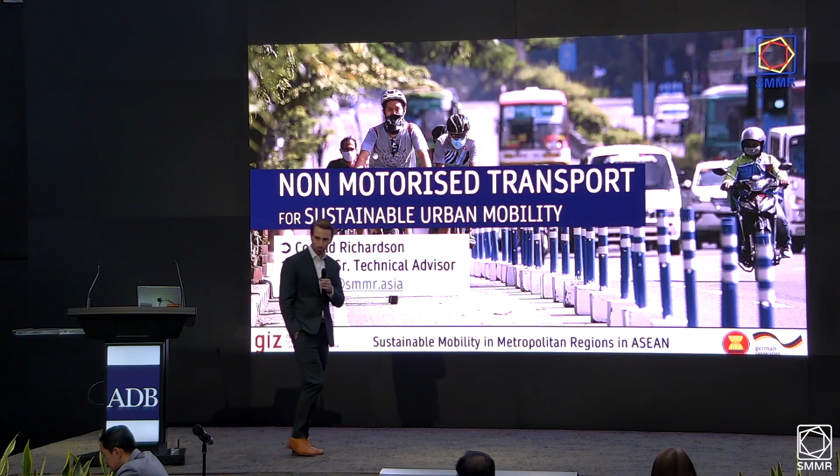I will be delivering the next two modules, this one on non-motorized transport, which I'm learning is and has been quite a hot topic in the Philippines. Non-motorized transport is key to sustainable urban mobility. So today we'll cover the fundamentals. We will look at the local context and we'll get very local.

I made a video of myself going for a walk around Pasig. We'll look at some of the best practices, and then from the best practices, we'll also do a brief tactical intervention if we have time, where we basically draw on satellite images and street cross sections.

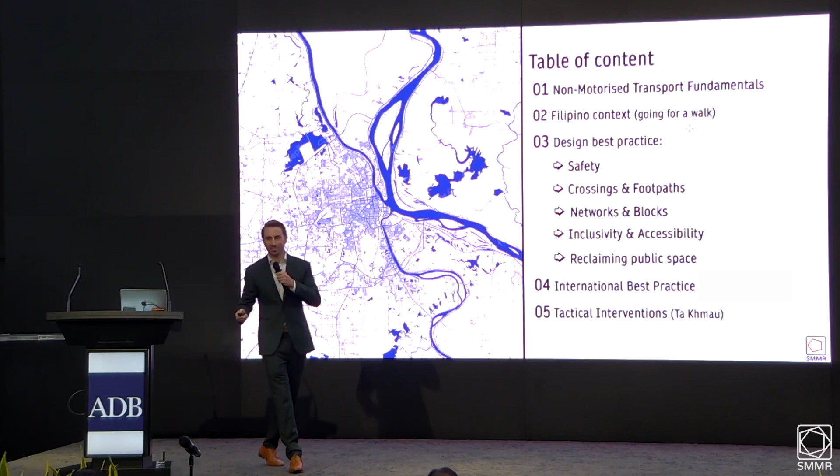So first things first, what is non-motorized transport? Can anyone name a mode of non-motorized transport? Bicycle, yes. Walking. Anything else? Baguio, I learned yesterday, has an interesting mode of non-motorized transport. Horses. I saw that in the video there was a horse icon. And then I inquired, and you have horses. What percentage of the mode share? Very small. Okay, so no justification for segregated horse lanes.

Not yet. So yes, walking, cycling, small wheel transport, wheelchair travel - it's essentially a form of transport that doesn't have an engine or a motor, which is in the name, non-motorized, and it's often referred to as active mobility or human-powered transport. It's a huge topic. It covers many different areas, from walking to cycling to parking to how you integrate utilities in your streets, green infrastructure, etc. We don't have time to cover it all today, but what I hope to get is an understanding of which areas of non-motorized transport and street design you would benefit from support.

But today we'll focus mostly on walking. That is really the fundamental of our transport systems, and we'll talk a bit about cycling, but not so much, because that is a huge topic in and of itself.

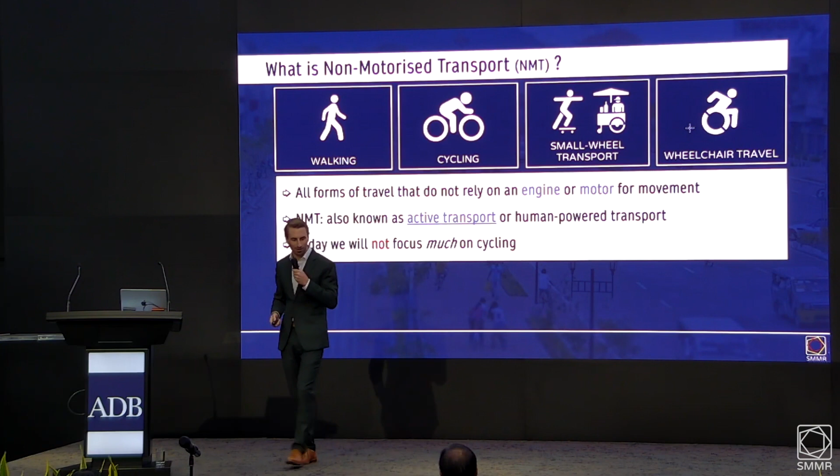And why do we promote non-motorized transport? Any input from anyone? Health reasons. Perfect. Cost. It's good for the wallet. Lower emissions. Yes. So yes, non-motorized transport is great at the personal level as an individual.

There's a lot of health benefits if you cycle. We met Karen yesterday at Pasig. She loves to cycle, and she did it for health reasons and economic reasons, also environmental reasons.

You can also avoid congestion, more or less. I see some of the cycle lanes in Pasig are congested with non-bicycle vehicles, which is not ideal, but I am pretty sure that for a lot of short distance trips in Manila and possibly in your home cities, you can get to your destination faster by bicycle, maybe sometimes even on foot, depending on the time of day.

So at a personal level, lots of benefits, but of course these benefits extend to the societal level. If you have a high share of walking and cycling, you will have lower public health costs. You will reduce the overall levels of congestion, which is beneficial, and you can also boost transit ridership. So a low share of walking is often not good in the context of creating new public transport systems.

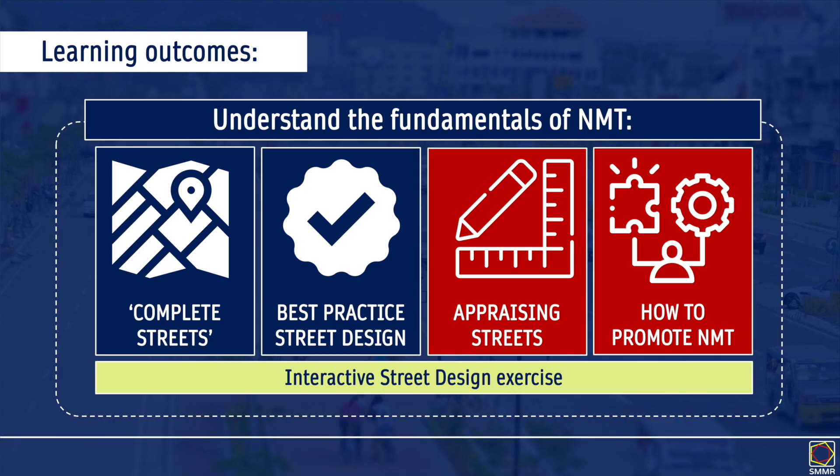And today, again, it's a huge topic. But by the end, I hope you have a better understanding of complete streets, what they are, versus traditional car-based streets, and we'll also look at best practice street design. And if we have time, we can look at different tools to appraise your streets and how we can promote non-motorized transport.

And I'd also like to also shape the discussion on how we can better communicate non-motorized transport activities, because sometimes they are not popular. I understand a lot of the recent efforts since COVID are not universally popular, and we all have a role of better communicating why we are promoting NMT. For example, using the 7 Ps of marketing we discussed yesterday.

And a lot of the reference material I use is from the Global Street Design Guide. This is, if you don't mind me saying, the Bible for non-motorized transport planners and street designers. It is a fantastic reference. It's full of nice schematic diagrams, so I highly, highly recommend this. And then, of course, I've looked at some of the road safety design manuals in the Philippines.

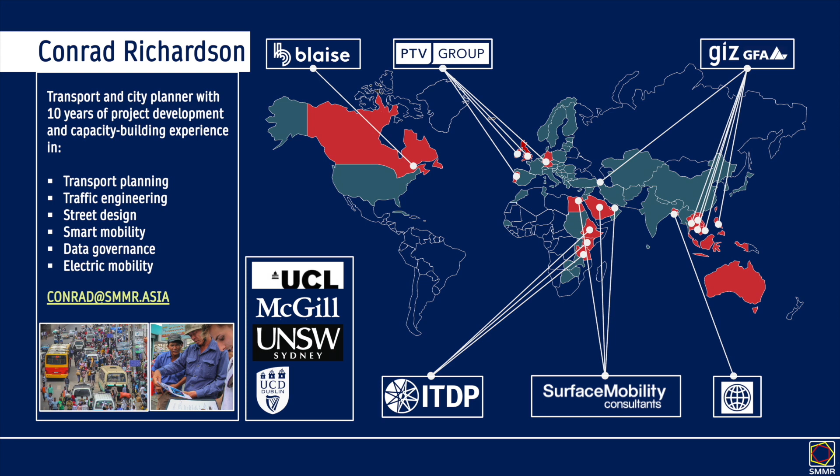About me - I won't go into depth here, but I worked in non-motorized transport for ITDP. Sovan mentioned them yesterday, they do great work on TOD and non-motorized transport, and I worked in East Africa with them. Since joining the ASEAN GIZ project, we are looking at non-motorized transport activities in our focus regions, and that includes the Philippines. We would really like to develop additional and new activities in one or all of your cities.

In Cambodia, where we are based, there is much work to do. The Philippines is decades ahead of Cambodia when it comes to walking and cycling, and the topic is still very dangerous. It's hard to talk about walking and cycling to the government, so we've had to develop our own methods. The situation is that a lot of government officials have cars and develop policies and designs around cars because they drive their cars, and oftentimes pedestrians are forgotten.

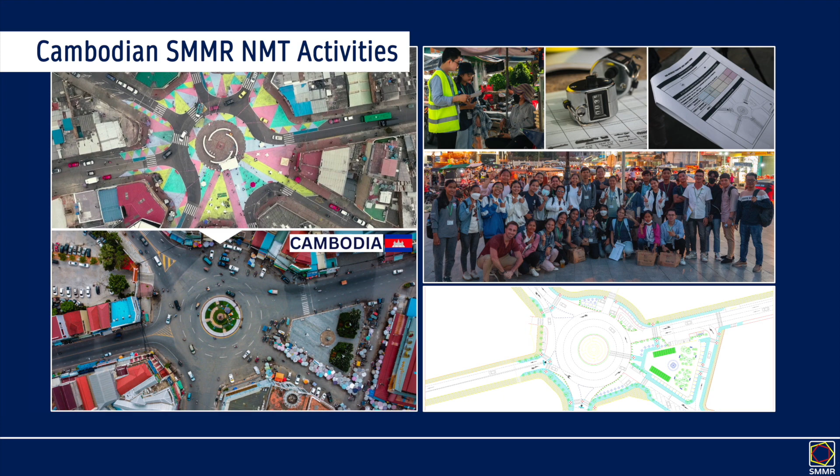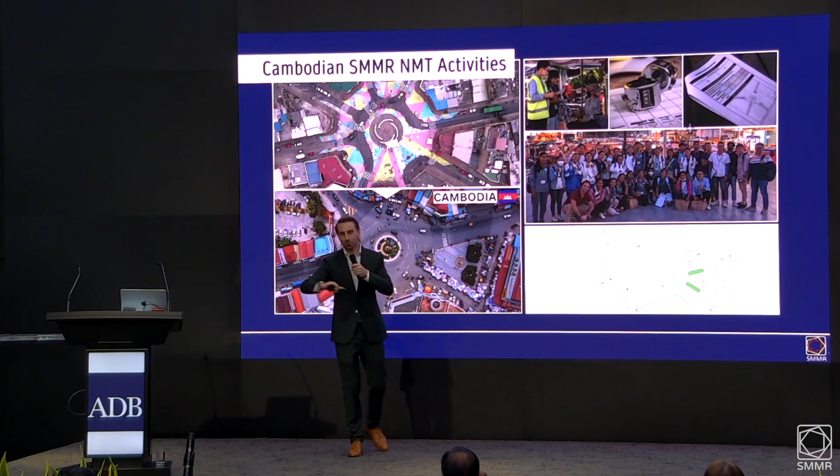So what we've ended up having to do in Cambodia is gently introduce non-motorized transport and good street design concepts disguised in traffic flow improvement projects. This is in Colombia. We are working on something very similar at an intersection in Cambodia, where we will really improve the traffic flow and the parking situation, but in doing so, we will reclaim lots of public space. That's an interesting approach to introduce these concepts in a rather gentle way. This is done with paint and plants, so if it's not popular, it's easy to remove, and if it is popular, then you can make it a permanent installation.

And that's called tactical urbanism. If we have time, we can get back to that.

But before we go any deeper, I'd like to take us on a little walk, a walk some of you might have done as well, to Shaw MRT station. I think we can play the video. This is me, Saturday, around 3 p.m., so not peak hour. And I leave the hotel.

Here you can see, I like this - this is good, you have an accessible at-grade ramp here as well, so if you're a wheelchair user, you can cross the street. It sort of leads into the bike lane, which is not ideal. Here we have a bike lane, I did see it used. They are used quite widely in Pasig, which is good, and they're not very protected, but they're somewhat protected.

And here I am crossing the street. This is a refuge island in the middle of the street. This is good, it helps me cross in two stages, and it means I can cross safely, check one side, check the other side, then cross. Here we continue - again, an accessible ramp, but there is a curb, so I don't know if a wheelchair can get up that. For me, it's fine, I am young, I am fairly agile. This is easy to navigate, but maybe not for everybody.

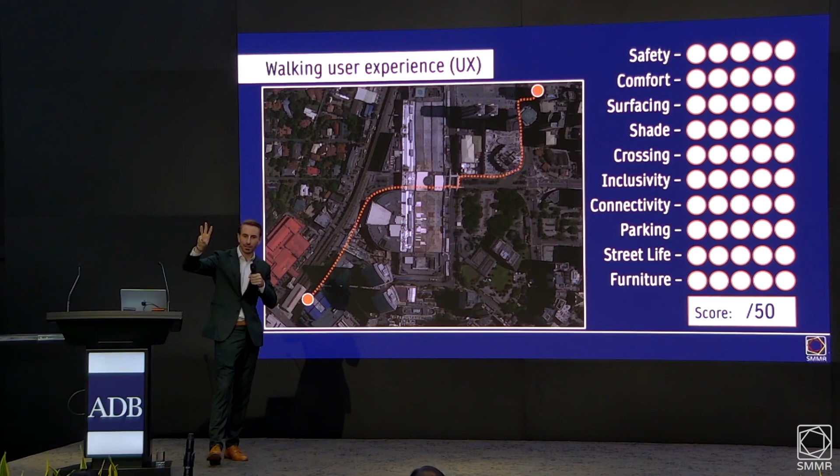If we go to the scoring criteria, and we can put up our hands, this is purely by feel. How safe was my walk? Out of 5? 3? Yeah, I didn't feel like I was in great danger. There was a few moments when I was passing the entrances of the malls, so I think 3 is fair.

Comfort? 3? Okay. You haven't been to Cambodia. We're really on the street in the city center, and this is quite enjoyable.

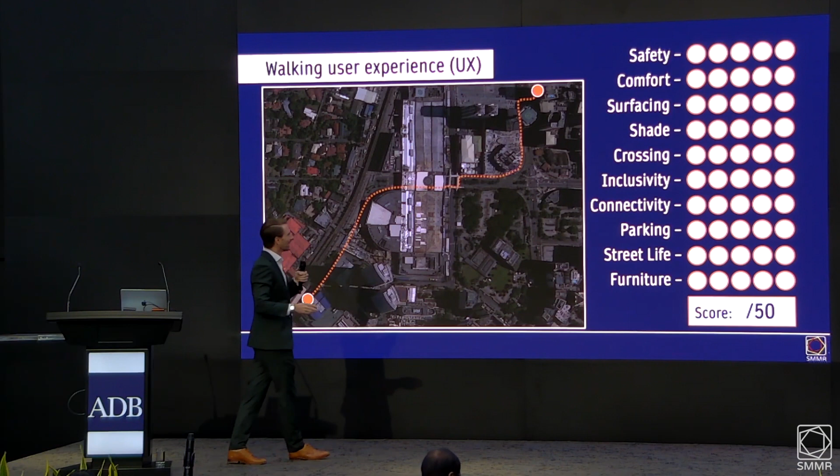It's all relative, I suppose. Surfacing - so you got 3, 3, 6. We had a mix. The malls all had nice paving, but in between, not so nice. So a mix, maybe 3. Shade - 4? 2? 2 or 4?

The crossings - there was quite a lot of crossings. I don't like the overpasses, so in my opinion that would bring down the score. But there was a lot of quite good crossings. They were painted, very well identifiable.

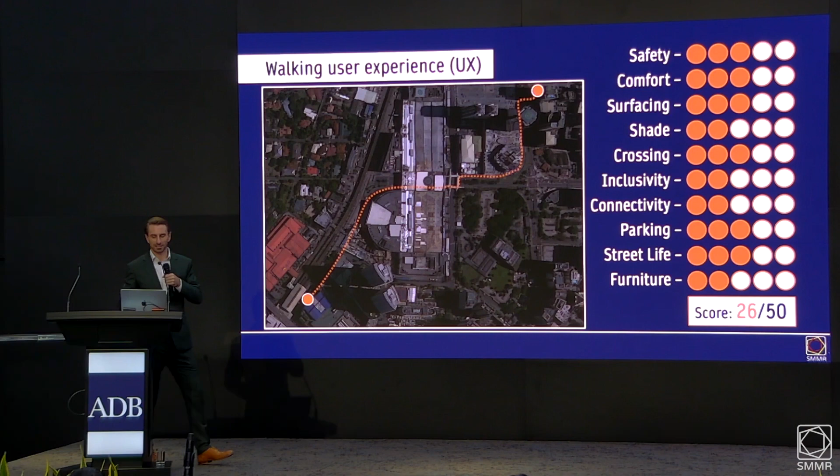Inclusivity - say you're in a wheelchair. Again, it's hit or miss, like 2.5. Yeah, I don't know what our total score was. I did it myself, I gave it about 26 out of 50, so just above 50%, and I could add and take, but that's my user experience. I think we can all agree there's a lot of good practice and a lot of room for improvement, and we'll look at what this is in this presentation, how this could have been improved.

So back to the fundamentals. Some of this will seem very obvious, but what is a street? Does anyone have an abstract explanation of what a street is? I hear little chatters of answers. I have a bit of a poetic answer - it's a unit of space through which people experience a city. It's where we experience a city, it's where we live. Chances are you are in a building or you're in a street if you live in an urban setting, and a lot of our life is experienced on the street.

And streets are spaces for people. So here you can see people - some are shopping, some are hanging out, some are socializing, and it's also a corridor for movement. Our streets should be designed for all these different experiences, and we should also think about the broader social, economic, and environmental goals of our city, and that all happens in and around streets.

So we need to design good streets. And streets, although in many places we don't design around people, they are not just spaces for vehicles. Streets are for vehicles and people. Highways are for vehicles, but if you plan your city extremely well, you will really not need that many urban highways. So our streets should really be nice and mixed.

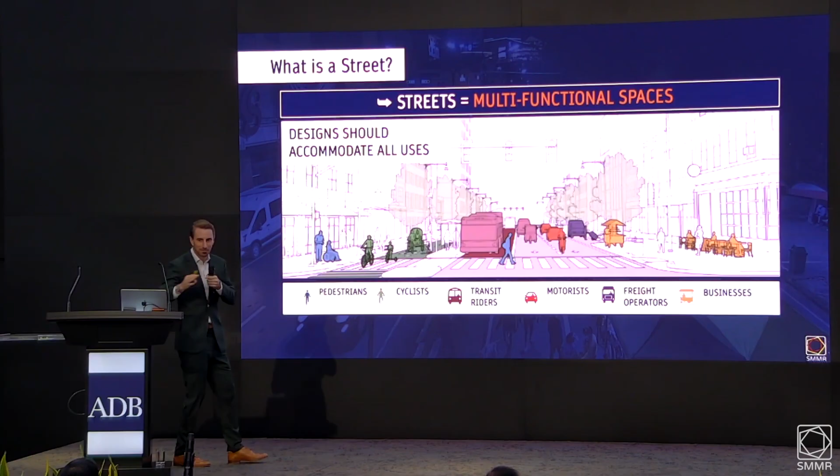Also, the parallel parking I quite like. I've seen a lot of streets here with perpendicular parking, where vehicles will park in perpendicularly and then have to reverse out, which impedes the flow. So this is a much better setup. Baguio, great job - all our streets should be designed a little more like that. Obviously it depends on the type of street, but a wide commercial street like that should cater for pedestrians, for cyclists, for transit riders, for motorists, freight operators, businesses. So a lot of different functions are happening on streets, and we should cater for them. This is done extremely well in Baguio here.

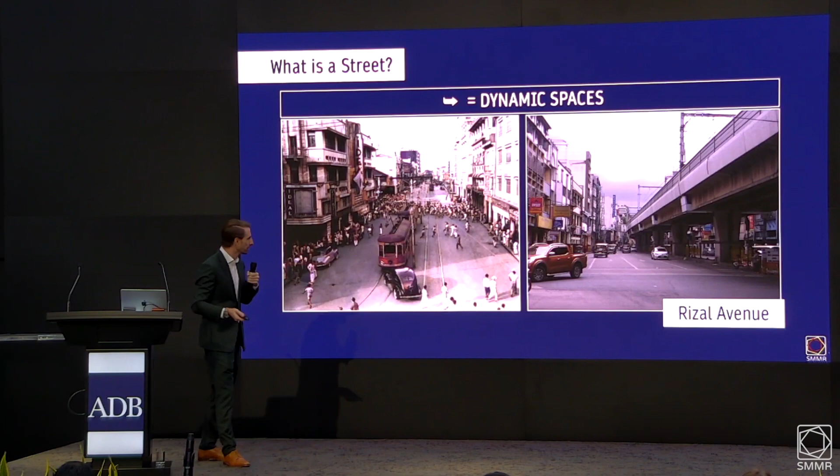Streets are also dynamic spaces - they change over time. This is Rizal Avenue in Manila. You used to have an at-grade, ground-level tram system, and today that's been elevated. But basically the point is, streets change, often around the dominant mode of transport, and more it's become vehicles in the context of Manila and probably your cities too. And they also change not over long periods of time, but very short periods of time.

During COVID, you saw a lot of your cities become void of traffic, which is quite a fascinating phenomenon, and that created an opportunity to introduce lots of new cycling infrastructure. It's just to illustrate how streets are very dynamic spaces, and you can really transform your city by transforming your streets. And we should be transforming our streets to more complete streets.

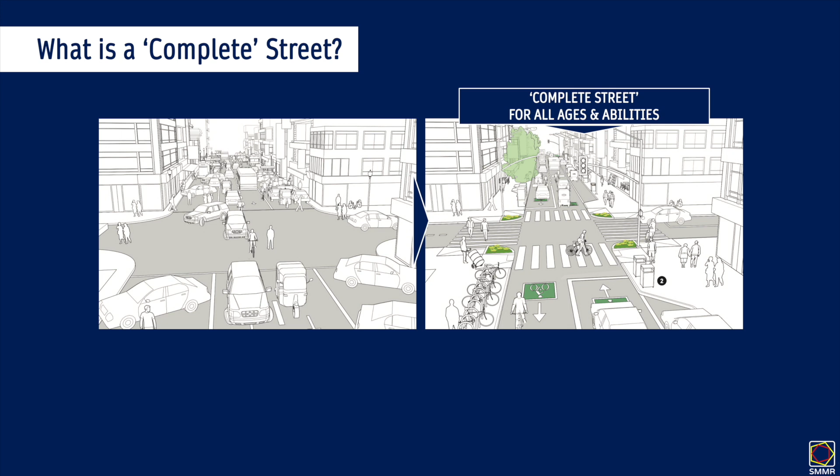This is the configuration we see in many of our cities. It's what many intersections look like - quite chaotic. If we were to create a complete street, there's lots of different definitions we can use. We heard living streets yesterday in some presentations, which are great. A complete street is an approach where we try to better balance the needs of non-motorized transport with motorized transport. This is a street that caters for all ages and abilities, enabling safe, smooth, and seamless travel for all.

I think Sovan mentioned yesterday how he did exercises where he was blindfolded. I did similar when I was in university - they'd put us in a wheelchair and we had to experience parts of our city and transit systems. You really realize how we completely overlook a small percentage of the population. But if you design your city for someone in a wheelchair, every single person benefits, including them.

So complete streets is really the policy and design approach we should follow, because it helps us in the context of road traffic accidents, noise and air pollution, energy consumption, inequity, public space, and public transport ridership. So this is the usual stuff you will hear.

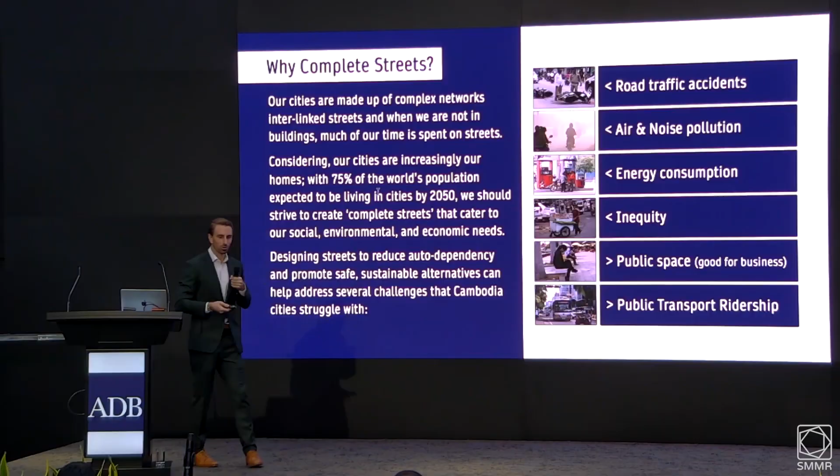So over to the Philippines, and you know this all better than I do. Philippines is growing extremely fast. The GDP has seen steady growth. The population is growing, the land use is growing because of the economic and population growth. We saw this graphic yesterday of how Manila is expanding horizontally, but also vertically. But the horizontal expansion is probably encouraging a rapid motorization rate, and the vehicle ownership rate is on the rise.

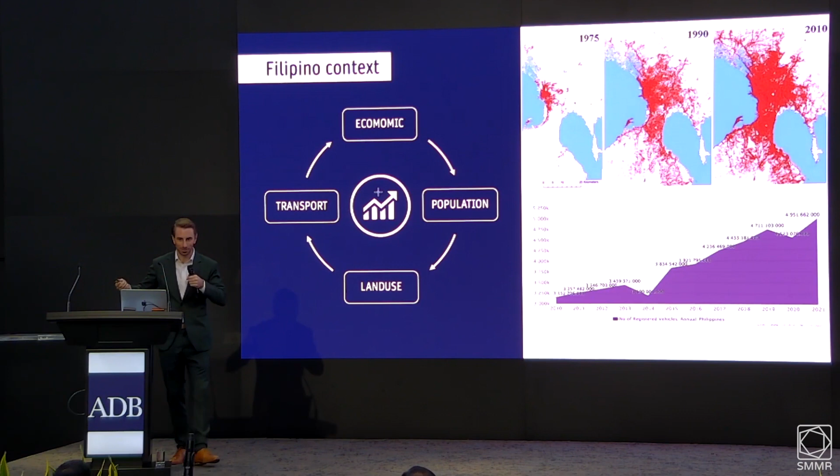I didn't realize how low it is - 6% nationally own a private vehicle, 7 to 8% in Manila. It feels like there's a much higher car ownership rate, which is a bit scary, because if another 2, 3, 4% get a private car, I have no idea how things will move, how anyone will get to ADB or anywhere in Manila, and maybe your cities as well.

And of course, with this, we get congestion, air and noise pollution, road traffic accidents, and as the country has modernized and motorized, the public realm has really suffered. It's received less attention and investment, and now we have inadequate walking infrastructure, dangerous crossings, poor illumination, and a lack of street furniture, which is the story in many places in the world. Which is unfortunate because our cities are our homes - it's where we live, we should try to make them attractive and enjoyable.

In many areas, the urban environment has been designed as if people on foot do not exist. I find this example quite funny - this is the Ortigas MRT station, very close to here. They built a dedicated bus lane carousel system without giving much thought to how pedestrians will access the buses, and they have this very narrow lane that has to be managed by an attendant. You might know this better than I do.

But if you can't access public transport comfortably and in a dignified way, chances are there's a lower inclination that you will use it. So we really need to reprioritize pedestrians in how we design our cities, and we need to find a better balance between motorized and non-motorized transport users.

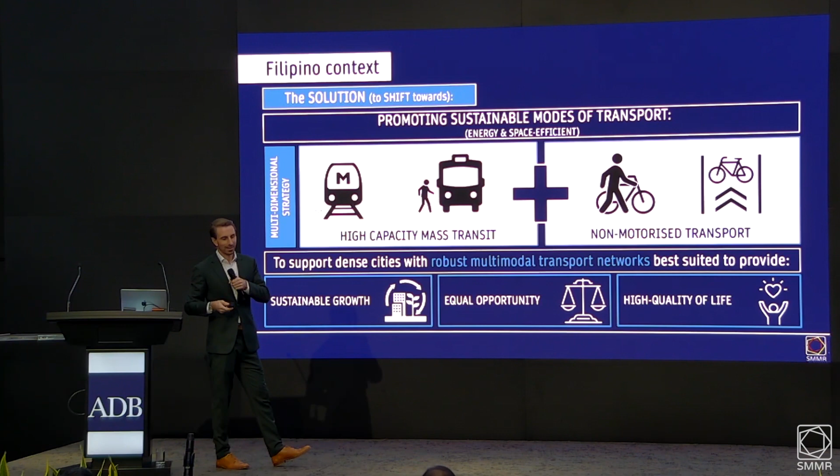Essentially, all of our jobs here entail absorbing growth. You all work and live in a context of growth, and when you boil it down, what we need to do is find the best way to absorb this growth, and it has to be done in a sustainable way that works in the next 5, 10, 20 years. A very good way to do that is by developing a multi-dimensional strategy that has high capacity transit, like we saw yesterday with the TOD module, plus non-motorized transport - they go very well together. When you really focus on these, you will reduce car ownership, and you can encourage more sustainable growth, equal opportunity, and a higher quality of life.

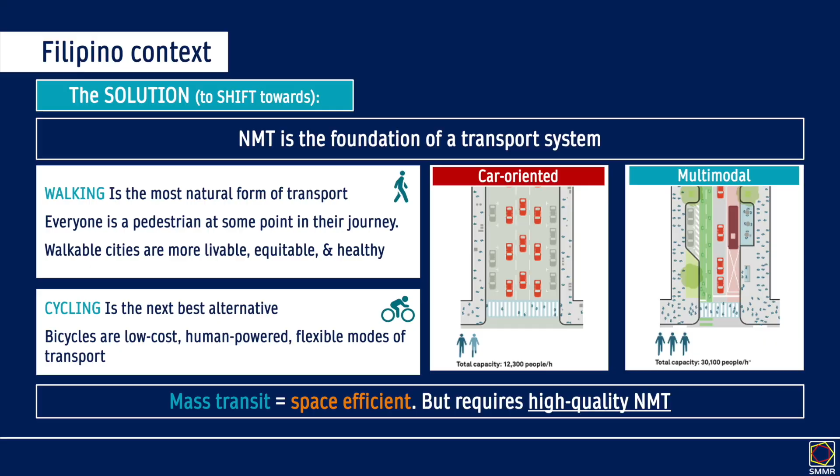I am very aware a lot of great work is happening in the Philippines. A lot of thought is going into this, and a lot of these concepts have probably already been presented to you. We are also following the low carbon transport project, and we have Elijah here—thank you for joining us—who helped lay some of the foundational steps of these sustainable urban mobility concepts. We hope we can help carry those forward together in a collaborative fashion.

A lot of very good work is happening, it's just quite patchy. I spent many hours on Street View moving around your respective cities trying to get an understanding, but I've seen a lot of good practice.

Baguio, you have an at-grade median which is accessible for all, and I see tactile strips for someone with a visual impairment so they can cross. General Santos, I see some kind of accessible crossing here. It's quite resource intensive, but it serves its purpose.

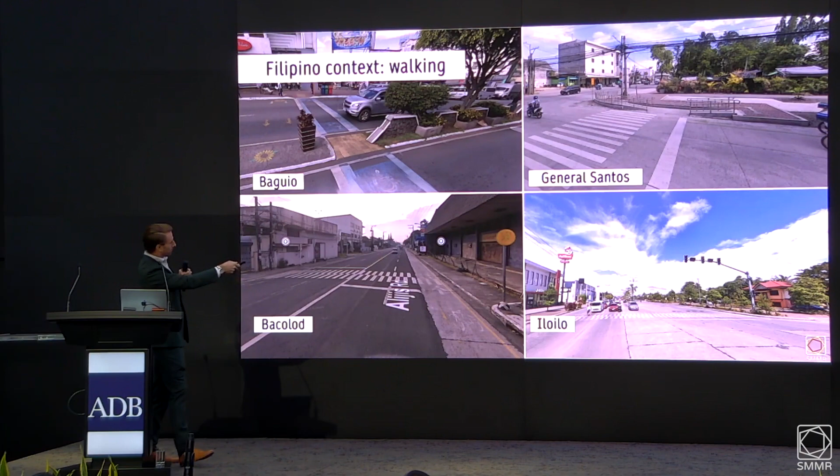Bacolod, I see you have a cycle lane here, and because it's not tarmacked, it is visually separated, which is good—it could be protected, of course. And in Iloilo, I have many other examples.

I'm not sure how this image made it here, but that's a very wide crossing. Maybe not an example of best practice, but you have a crossing and it's signalized. Maybe a refuge island in the middle there would be welcomed.

The same applies for cycling. All of you have introduced cycle lanes. I see them manifest in lots of different ways. Is there a national standard?

Separated at grade, okay, 1.5 meters—yeah, so I've seen a lot of nice examples. The topic of protected versus unprotected bike lanes is one we could probably open up. There's an interesting discourse happening between cyclists and car drivers, and it'd be nice if we could, amongst ourselves, discuss that and find ways to rectify it.

And Iloilo, I think this is your showpiece, which is great—wide. I'm not sure how easy it is to access the lane from areas that aren't part of the bike lane, but this looks like a nice piece of infrastructure.

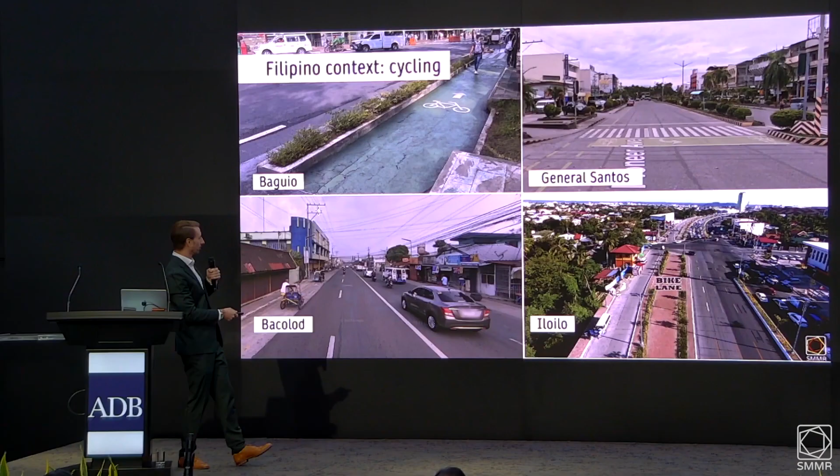From what I gather, a lot of the infrastructure that's been built is really along the highways, same in General Santos. So you've created cycling access to the CBDs, which is a great way to start. But from what I've seen, there are many ways we can create a much denser network of cycle lanes in your cities.

I spent the weekend here, and I went out in Makati on Saturday night, and I was thinking a lot about this presentation. So I cornered some unfortunate new friends and asked them their thoughts on non-motorized transport. Someone recommended I speak to someone who does have an opinion, just a civilian, and I wanted to get his take on bike lanes.

His opinion was that protected bike lanes are few and far between. I tend to agree—I haven't seen that many protected bike lanes. I don't know what the ratio is in Manila, but maybe 10% protected, 90% not protected.

The bike lanes have become very unpopular because people think they impede car traffic and should be removed accordingly, which is a bit selfish on behalf of car drivers because cars are very space hungry when they're parked and when they're in motion, whereas a little bicycle really doesn't take up much space.

And the widths of these lanes vary a lot. So you have the 1.5 meter standard. That's the total width mandated, or the minimum width. But the effective, usable width of the bike lane is often significantly less because you have gutters, or a space between the curb and the tarmac that isn't very usable. So the minimum measurement, 1.5 meters, should be effective width, not total width. You need 1.5 usable meters.

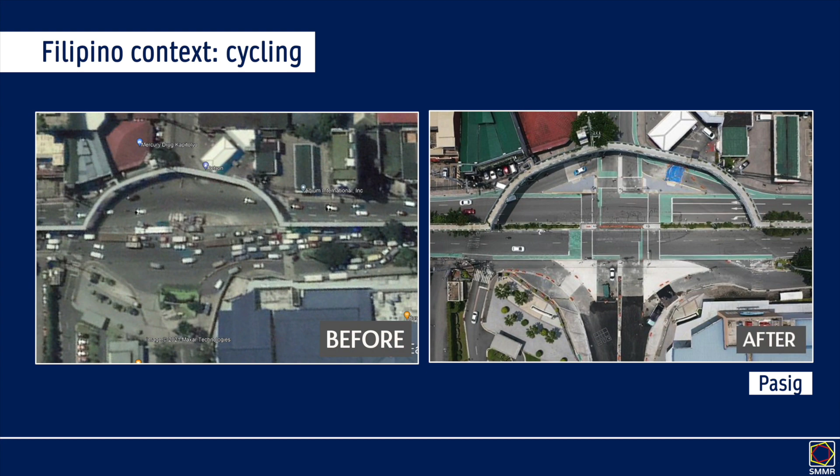Here's an example in Pasig. Again, lots of nice infrastructure, but how it is used is not always ideal or favorable for cyclists, so he has to veer around the jeepneys. So that's sort of the context we are working with, and there are many practices we can use to improve safety.

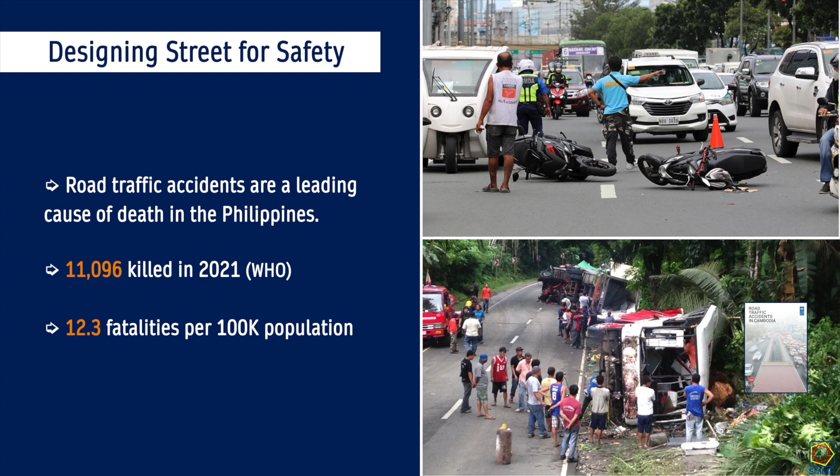Even if you have no desire to improve the walking environment or cycling environment, the safety dimension is extremely important. And safety is an issue. Also in 2021, 11,000 were killed in traffic accidents, which is 11,000 too many. That's an outcome of poor driving behavior, but our street design can greatly influence driving behavior. So we should better design our streets.

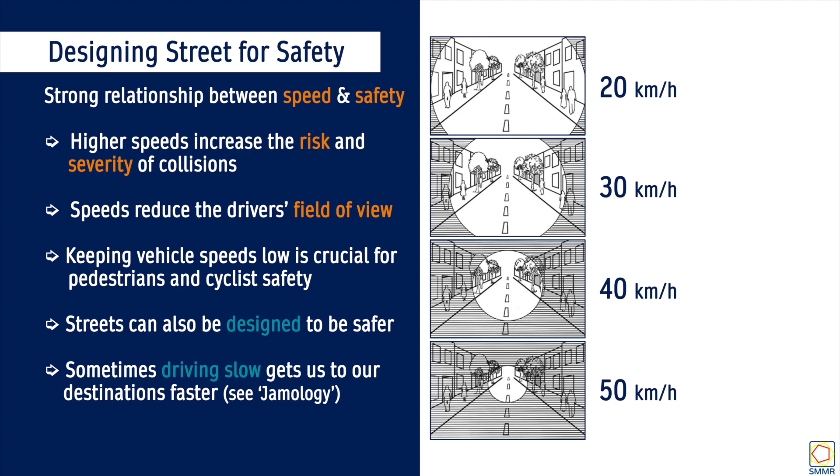And a good start is just better managing speed. You may have seen some of these already, I will go through them quite quickly. There's a strong relationship between speed and safety. The faster you drive, the more your peripheral sight becomes blurred. So say you're driving at 50 kilometers an hour on your motorbike, and something as simple as a street dog runs out, you can't see it and you can't react in time.

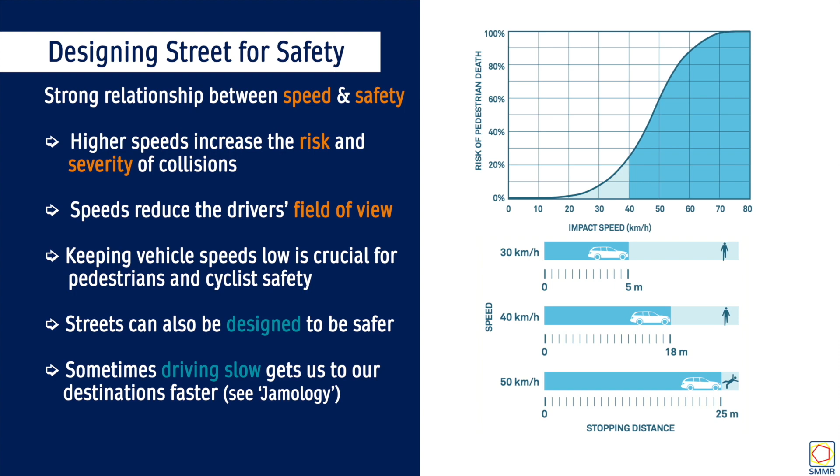And then you can have a really bad accident at any moment. So lowering speed is definitely a good thing, and it also reduces the risk of fatality if there is an accident. Above 70 kilometers an hour, it's pretty much guaranteed there will be a fatality. But if you lower that speed to 30 kilometers an hour, the risk is significantly reduced, and that's because of stopping distance.

I know the idea of lowering vehicle speeds may not be popular with car drivers, but if we slow down the overall average speed, we can sometimes, in many instances, reduce the overall journey time. It's counterintuitive that lowering speeds helps you get to your destination faster, but if you lower speeds and reduce congestion, your trip becomes shorter. There's a whole theory around that, it's called jamology. I can recommend searching that, but lowering speeds can be beneficial for everybody, including the car drivers.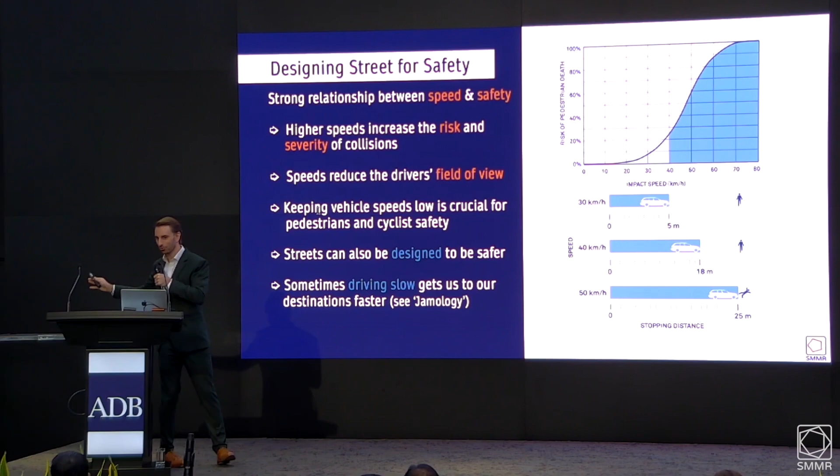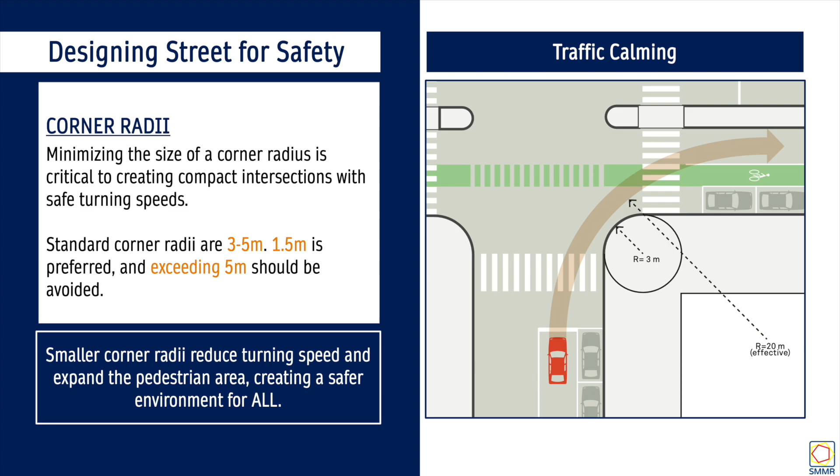There's many ways we can do that using street design. Traffic calming is a way of designing our streets to slow down traffic, with lots of interesting design ideas for that. You can narrow your lanes, you can reduce your corner radii. A lot of turning movements, and one of our examples in the interactive exercise has very wide turning movements, which means vehicles can drive really quite fast around the corner, which is quite dangerous.

So if we can tighten our corner radii down to 1.5 meters, that's really best practice. It really forces cars to slow down, but anywhere from 3 to 5 meters is good. And if you tighten your corner radii, you also reduce the pedestrian crossing distance. So you slow down vehicles, you reduce the crossing distance, everybody wins. And here's an example.

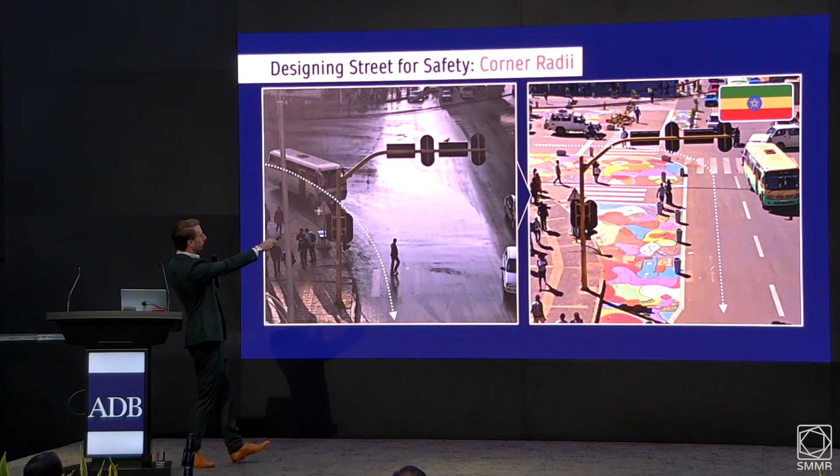This was in Ethiopia, the city I was working in. Very wide radius, singular. This guy is very exposed by traffic that might be moving quite fast. Using paint and plants, we tighten this up, so vehicles have to slow down much more, and we've also made this crossing distance significantly shorter.

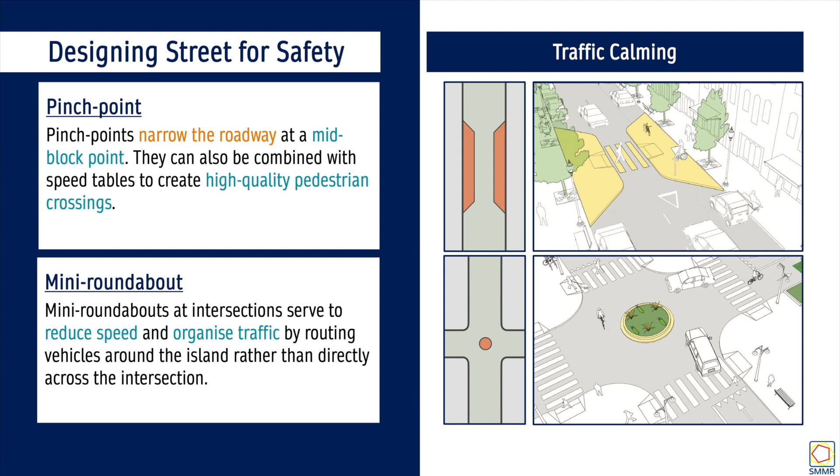Another few design ideas, and there's dozens of these—check the guidelines for more. You could create a pinch point if you want to slow down traffic. That mightn't be very popular, but it's also beneficial for pedestrians. You could introduce a mini roundabout at an intersection if vehicles are taking dangerous turning movements, forcing them around the roundabout. That can organize traffic and slow speeds.

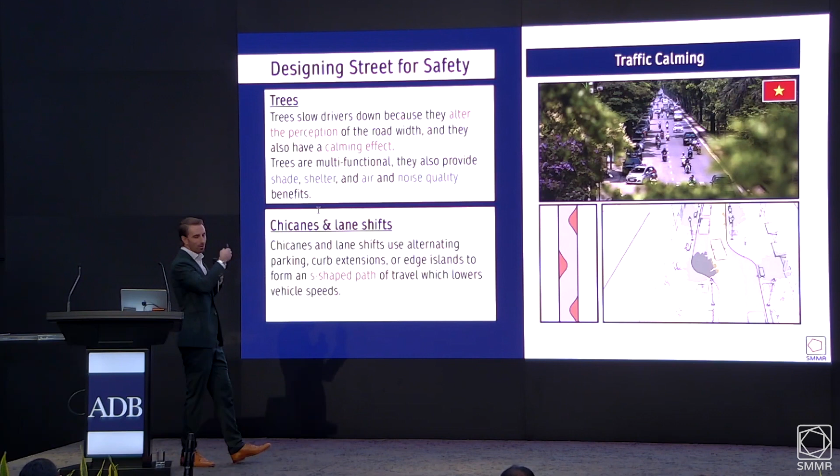Trees have lots of benefits, but they also induce a calming effect. If you drive down a street with lots of trees—this is an example in Hanoi—you have a tendency to slow down. It also alters your perception, narrows your field of view, so you have an inclination to drive slowly. One of dozens of reasons to include green infrastructure in our streets.

Another example is chicanes, lane shifts. Here's an example in Singapore where they create S-shaped paths, so you're forced to slow down. And I imagine it's also still quite fun to drive along—you feel like you're a race car driver almost.

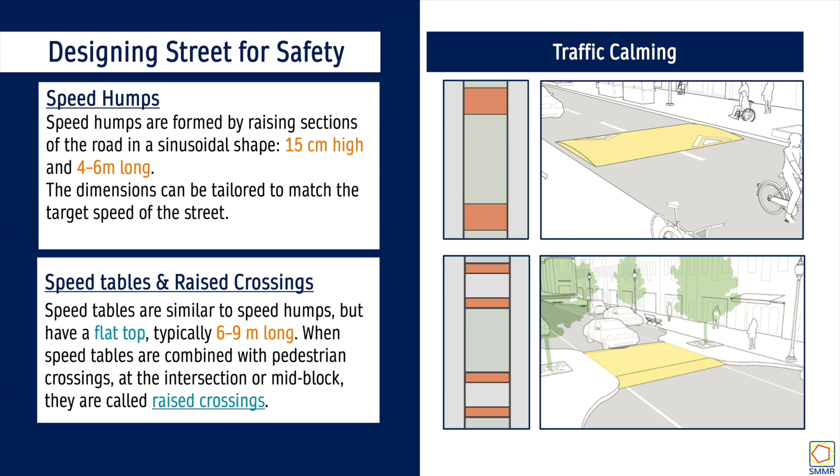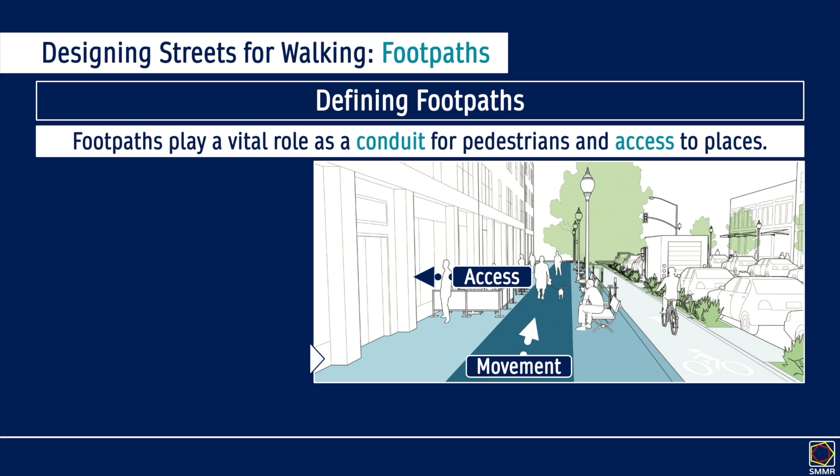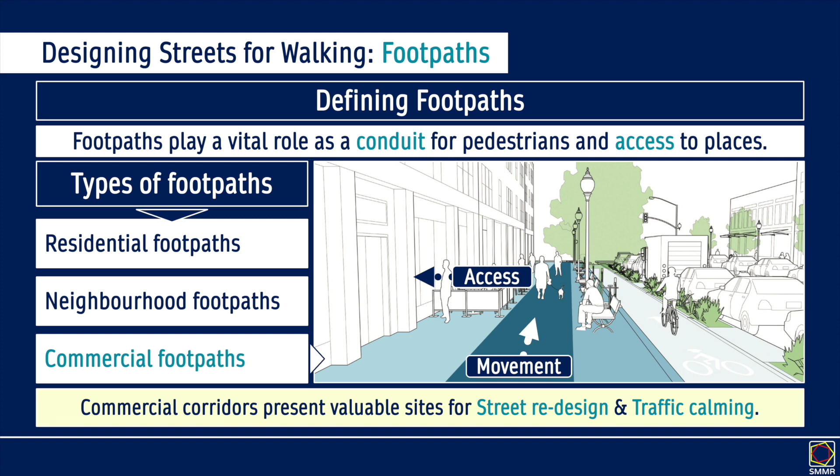So that's safety. Now over to our footpaths, because NMT is really creating high quality infrastructure around all of these different elements. So safety is one, then you have to have good footpaths. Footpaths are how we move through space, but also access buildings, and there are many different types. For the sake of this exercise, we'll look at commercial footpaths, which would generally take priority when you're looking at ways to improve your city environment.

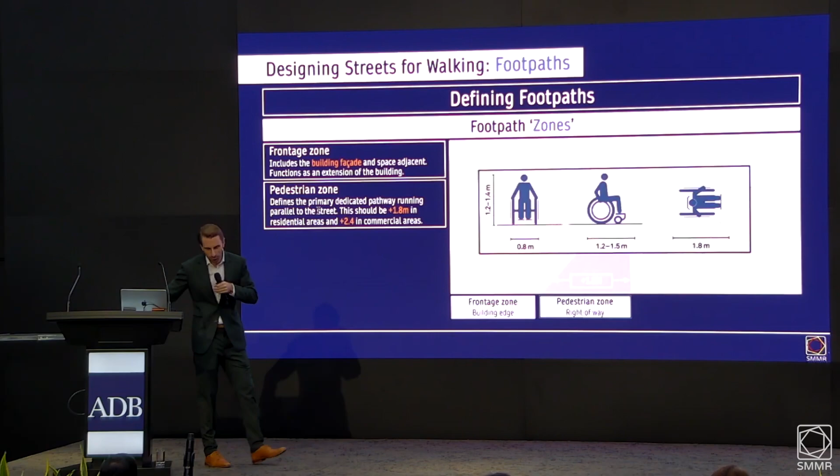The way a footpath can be broken down is into different zones. You have the frontage zone, the area in front of the shops and buildings. Then you have the pedestrian zone, which should be unobstructed—this is the pedestrian right-of-way. That should generally be a minimum of 1.8 meters, so two people can comfortably pass each other, but also a wheelchair can comfortably move through that space and rotate around itself. We also have a furniture zone, benches, lights, green infrastructure, utilities.

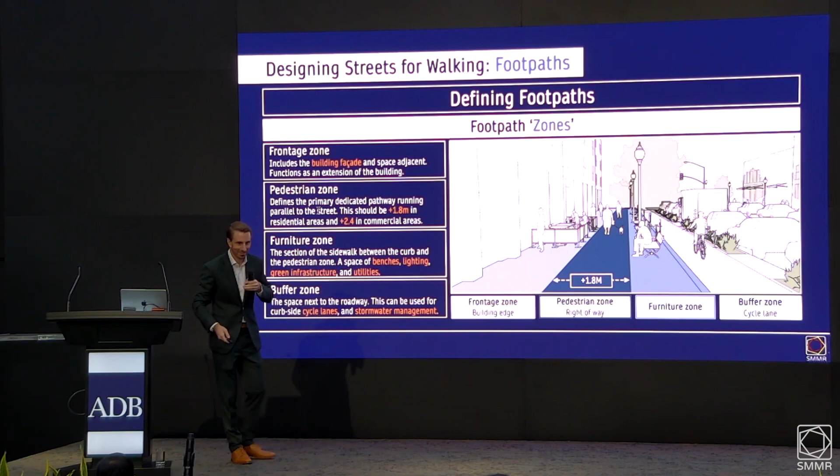And if there's space left over, which is part of our cycling network, you can have your cycle lanes. Ideally your cycle lanes aren't on the street next to traffic—you could have, say, your parking in between, or a strip of green infrastructure to make it safer. And there's also different elements.

You should want to have an active frontage. You don't want to have just a blank wall on your street—ideally you have lively shops, lights, seating areas, and green infrastructure, which I previously alluded to. When it all comes together, you can create a nice network of footpaths, which also take into account driveways. The footpath should be continuous across the driveways, which we didn't see around the mall here. And you can separate or block vehicles from entering the pedestrian space using bollards.

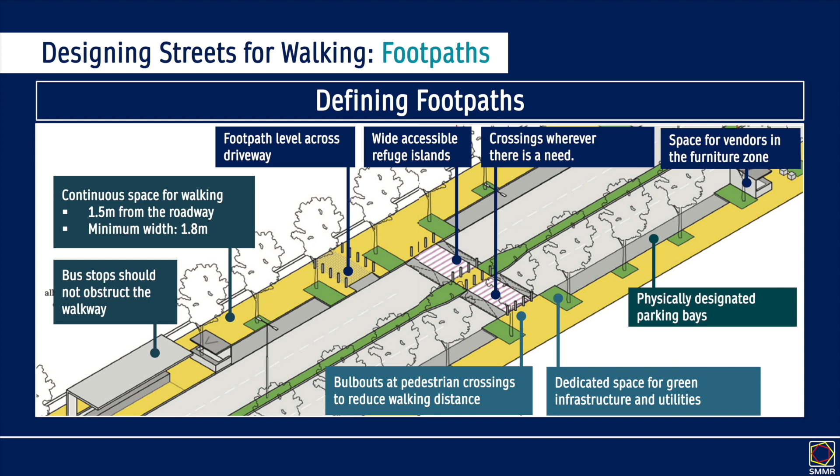You also have to give thought to your bus stops, and I've seen different examples of that being done quite well. You can have designated parking areas—here we can see it sort of bulbs out, which reduces the crossing distance. We have a tabletop crossing. So all of these different ideas can come together to make nice footpaths.

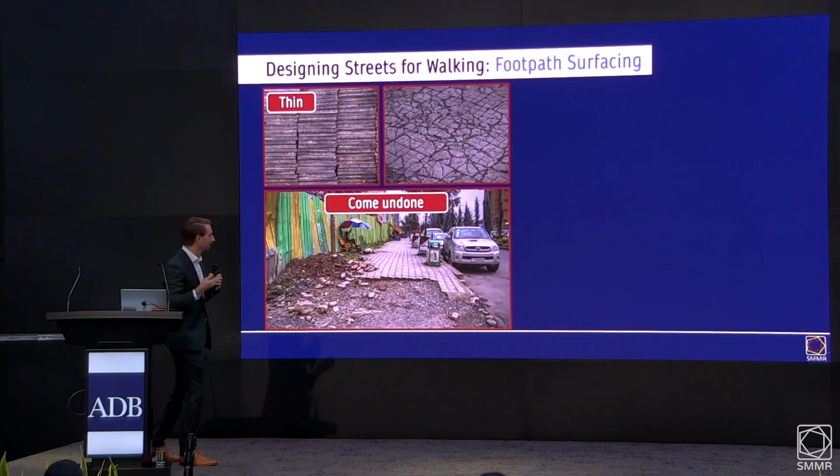Then they shifted to these kinds of thicker blocks, smaller and thicker, but they didn't lock well together, so they were coming undone. A better option is to have thicker blocks that are interlocking, so they will not move and are less likely to shift, creating a more smooth and seamless footpath. So lots of little details like that you can take into account.

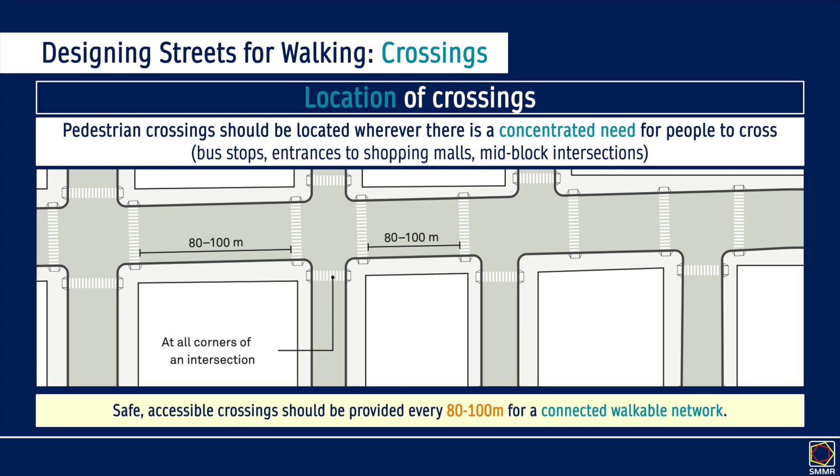Once you have good footpaths, you need to be able to go from footpath to footpath, so you need good crossings. For good crossings, you need infrastructure wherever there's concentrated need. At intersections, people will want to cross, so you should have crossing infrastructure. But sometimes at mid-blocks people also want to cross, so where there's a shopping mall entrance but not an intersection, you probably should have a crossing. Same with bus stops, and generally every 80 to 100 meters you should have a crossing.

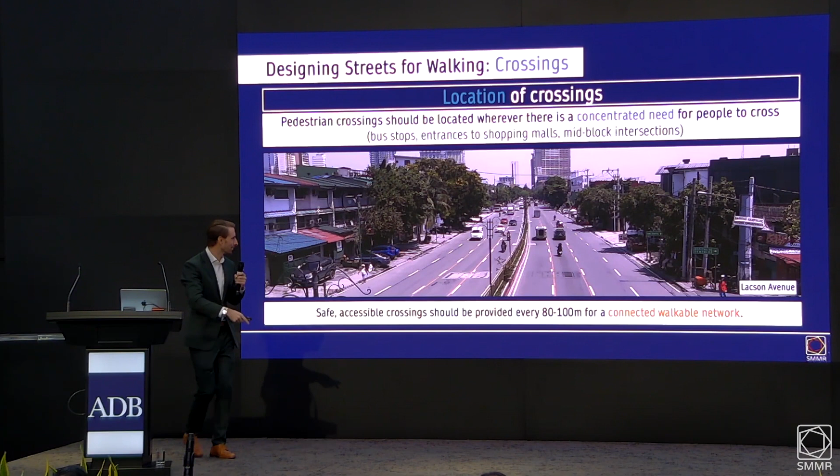This is Lacson Avenue in Manila. I imagine if you live here and your neighbor lives here, you very rarely see each other because you may have to take your motorbike and drive for 2 kilometers just to see your neighbor, because there's no pedestrian crossing infrastructure, which is a shame. It really starts to dissect our city and dissect our communities.

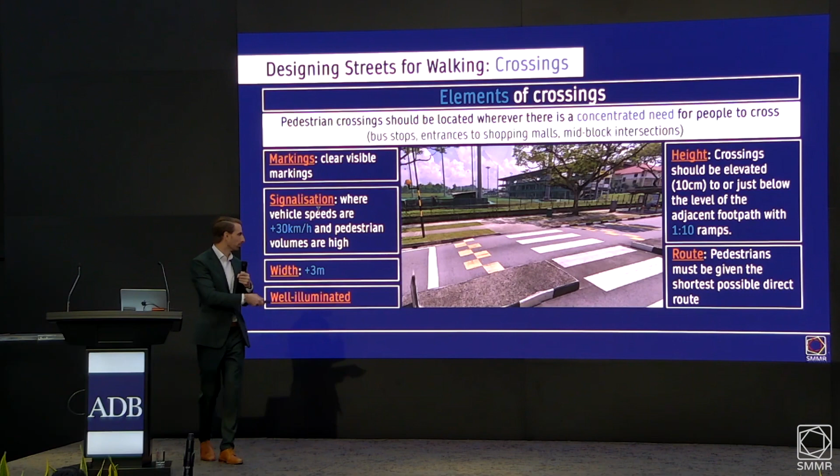The crossings should be at grade. Generally, unless absolutely necessary, overpasses should be avoided. An overpass is maybe a good thing if you're crossing a river, but not necessarily a street, because they increase the crossing distance for people, decrease the footpath area, and they're super expensive.

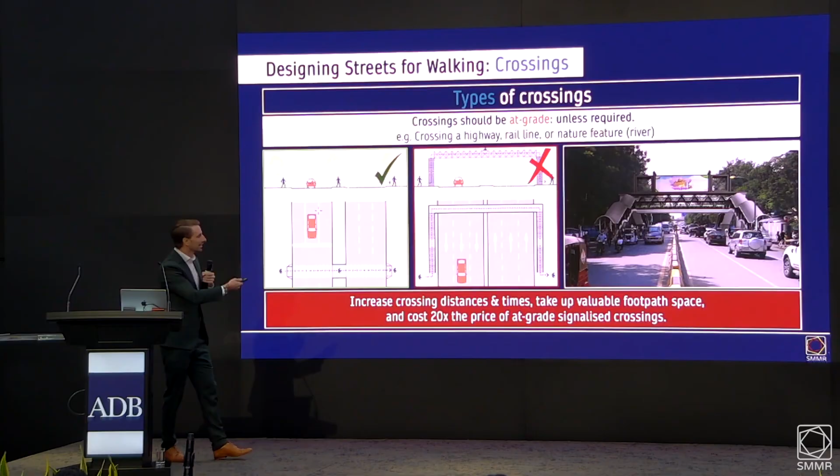A better strategy is just to have a broader sustainable urban mobility strategy that focuses on reducing vehicles, not one where we just build around vehicles, which doesn't work because guaranteed people are crossing over the median because this is just inconvenient. There's a nice example in Makati.

Crossings should be at grade unless you have a tabletop, and should be aligned with the pedestrian right-of-way, so you have a continuous line to walk across. If you don't, chances are people will just cross following the pedestrian right-of-way, and the crossing might not be aligned with that. That's known as pedestrian desire lines, and there's another example in one of the interactive exercises we can look at.

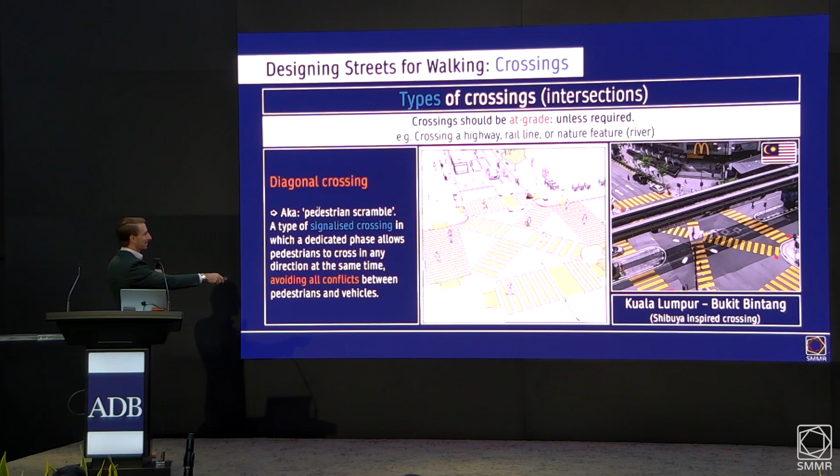Diagonal crossings, if you have a lot of pedestrian movements, these are quite cool. In Kuala Lumpur we have Bukit Bintang, inspired by the Shibuya crossing in Tokyo, but Shibuya crossing moves 500,000 people a day. The way it works is it's a signalized intersection, and there's a phase where no vehicles can drive and all pedestrian movements are possible. It's really beautiful, you see all the people pour in, and if there's very high demand for pedestrian movement, this is a nice option.

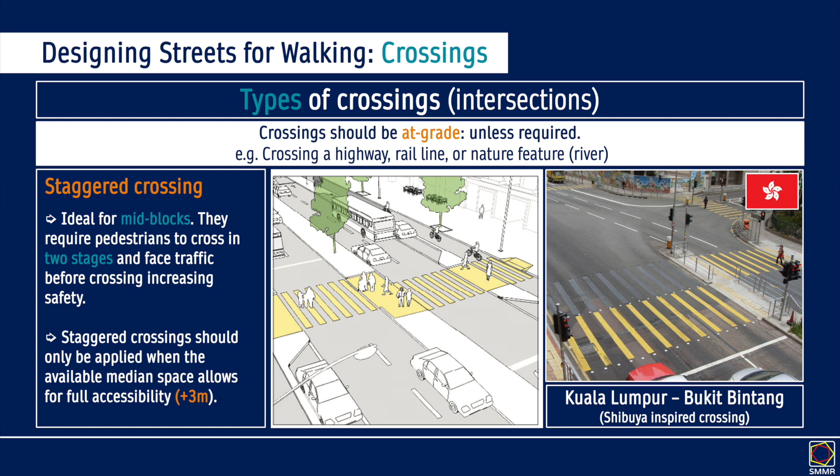Staggered crossings, another option. If you have a good refuge island, you can make the crossing 2 stages, which is a lot safer. In this configuration you have to cross, then turn, face traffic, so you see the oncoming traffic, it's much safer, and then you can continue. So that's a really nice option.

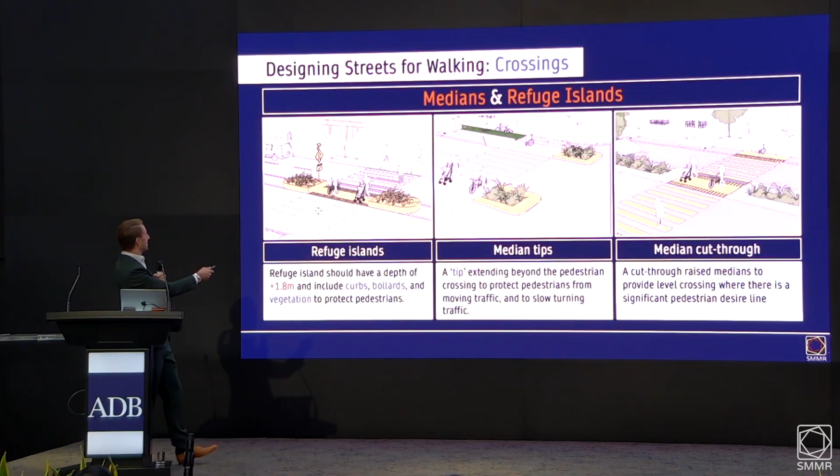Refuge islands are very important, and there's a lot of good practice already happening in the Philippines, which is great to see. There are different ways to make them comfortable and protected. One is with median tips, which means vehicles will really not get too close to you. They should also be wide enough, 1.8 meters minimum, or probably the minimum should be the length of the average bicycle, so that a bicycle user or someone with a pram can safely take refuge.

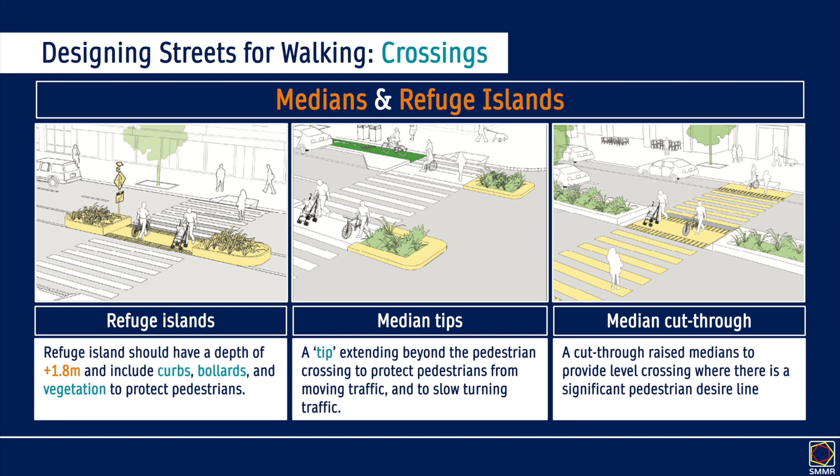So that's footpaths and crossings, and it's great if you introduce these, but you have to really create a complete network of good footpaths and crossings if you really want to encourage non-motorized transport. And that's in part determined by the block sizes.

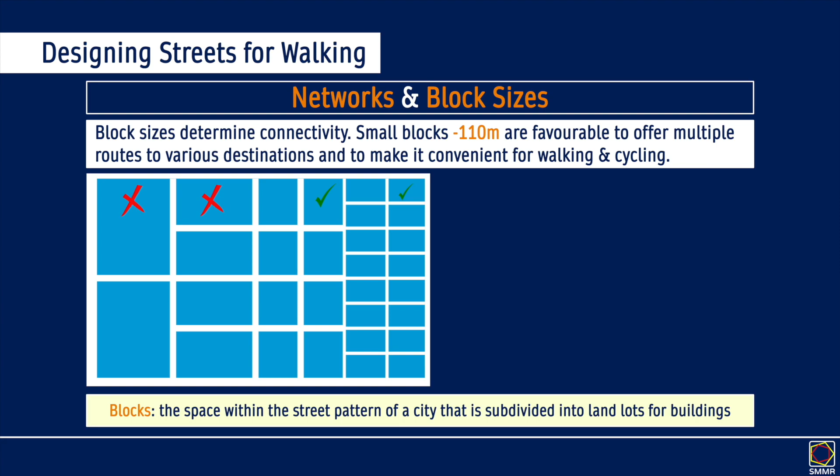Some of your cities have finer blocks. Not too sure about Manila, around here quite big. Wherever Daniel Burnham was, so in Baguio, I think you also have, in the older areas, maybe smaller block sizes? Small is good because you can make more interesting trips where you can move between the blocks, as opposed to very big blocks where you'd be more inclined to not walk and use a different mode of transport.

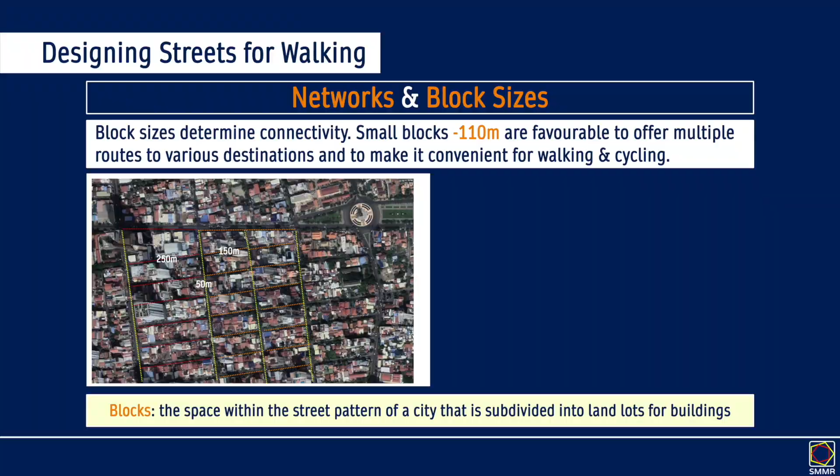This is in Cambodia. The city center is built off an original French urban plan, so we have nice blocks, which makes it very convenient for walking if there was good non-motorized transport infrastructure. It's really easy to navigate the streets.

Of course you can't just recreate your street grid, but there are ways, especially as many of you develop new infrastructures in your city. Every time a new mall is built is also an opportunity to create an arcade or a passageway through the mall to make the block size smaller.

This is how you could configure your urban area. I know space is not in abundance in some of your cities. Baguio, I've heard that many times, that you just don't have much space. But there are interesting ways you can reclaim some space and create nice networks.

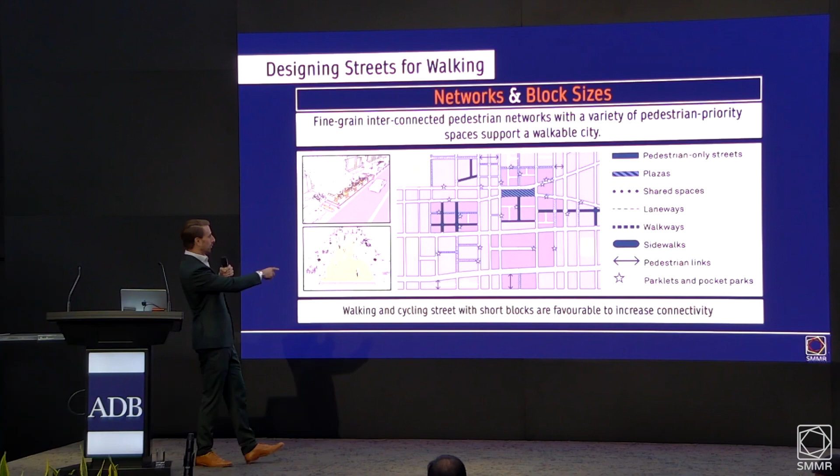So here we have our street network. Some streets are pedestrian-only streets, some have plazas, some are shared streets, and there's also some parklets. I'll show some examples of what these are, where instead of having parking, you take two parking spaces and make a little public space. You can also have slow zones.

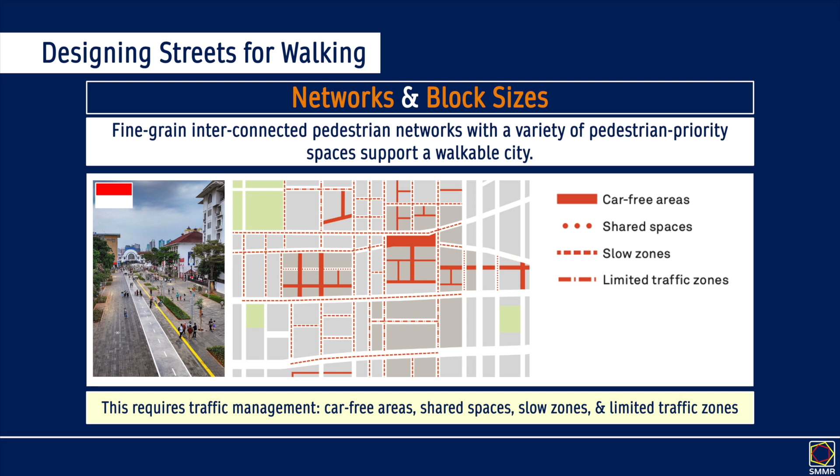If you want to promote non-motorized transport, you have to manage traffic and find a good balance between both. There's some nice examples over in Jakarta—there's Kota Tua, the old historical center, and they've done really good work to create a low emission zone.

I think similar ideas could apply in your cities, especially in historical areas. In Manila, you have Intramuros—that's an area where there could be a lot of improvement, made into a low emission zone and eventually a no emission zone. Here they redirected traffic, introduced new cycle lanes, blocked off certain streets, and pedestrianized one big avenue. It's a really nice project.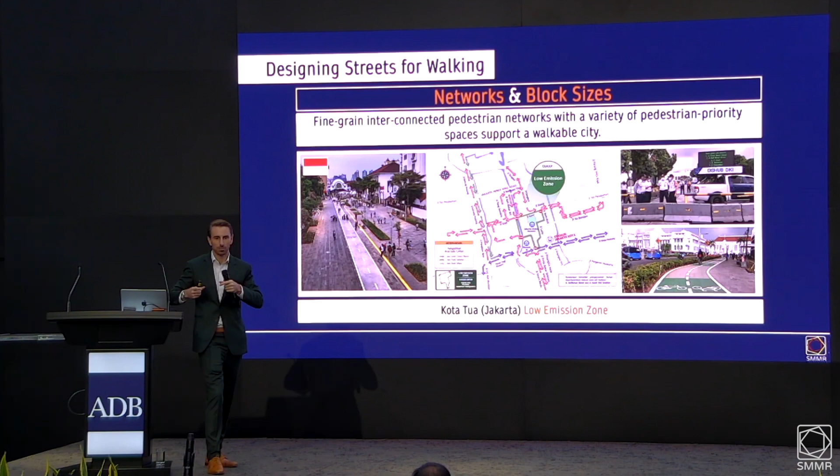That's also a way you can start thinking about non-motorized transport. Pick a specific area, and I know that's being done. Baguio, you have plans for the inner city area, and maybe you can draw inspiration from the likes of Kota Tua in Jakarta. Then accessibility is extremely important.

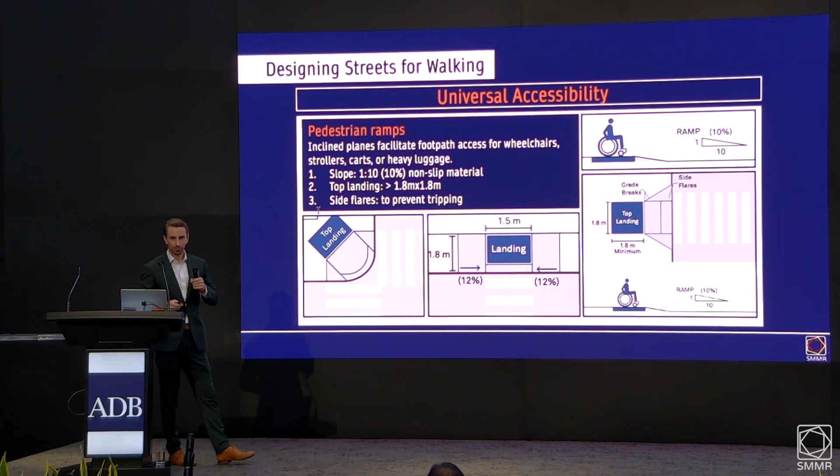We have the need to provide for, say, wheelchairs, but anyone—even someone with a suitcase or a small cart—would benefit from ramps, and there's design standards around the ramps. I think you already use them. Generally, it's no more than a 10% gradient.

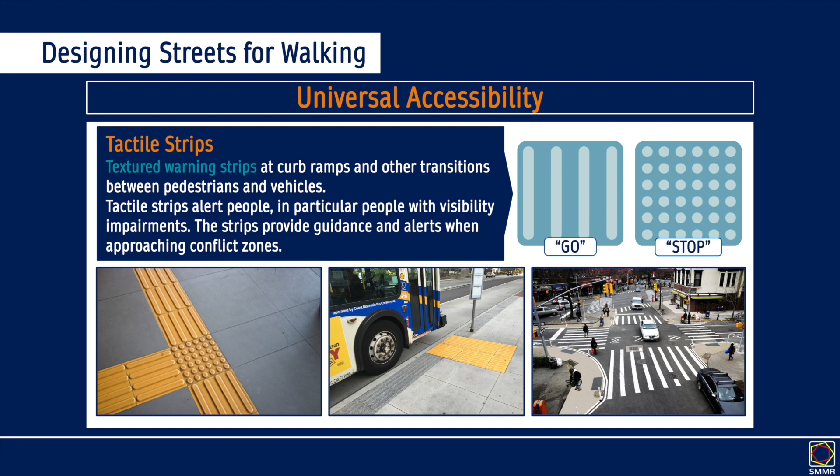Tactile strips—I've seen some of your newer footpaths developed with these, but it doesn't seem like the malls are using them, for example. I don't know if they're included in the national standards, but basically these strips tell you when you can go, when you can stop, where public transport is. It's obviously very valuable and necessary for visually impaired street users.

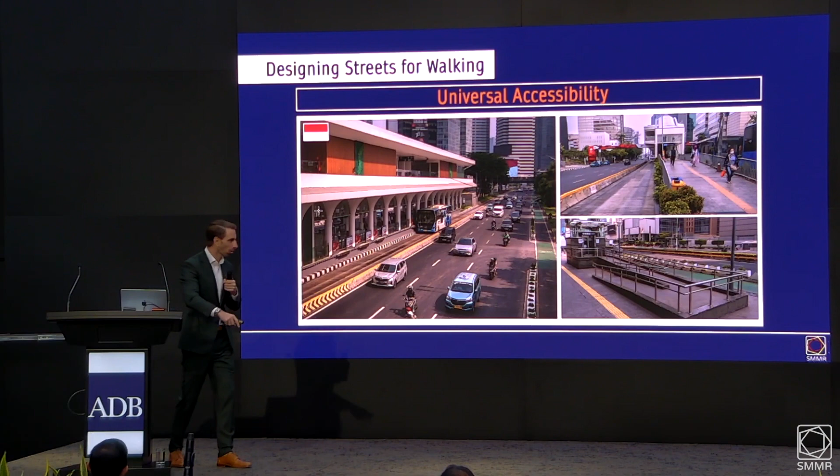Some of you are considering BRT projects. A BRT project is so much more than just a public transport project—it's really a catalyst to revamp an entire urban corridor. You can give thought to how the BRT can link to non-motorized transport, to good footpaths, to cycle lanes, and you have to give a lot of thought to how you can make it accessible to all.

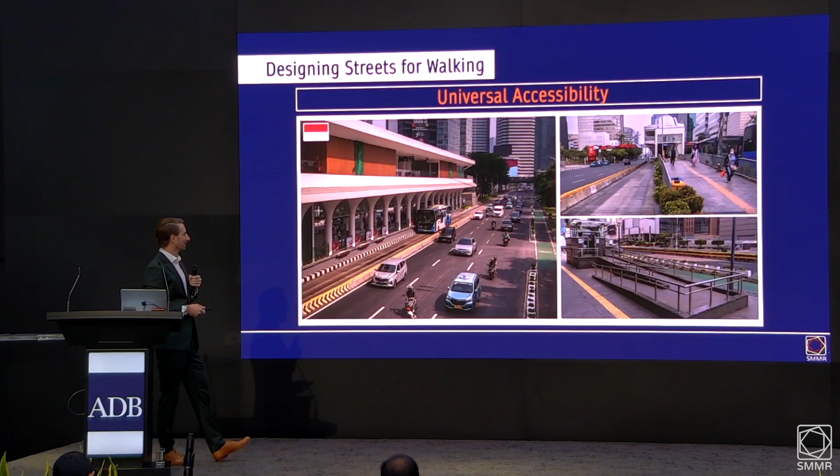So this is the Transjakarta. You have ramps to access the stations, and obviously the buses have level boarding. When you are planning your BRTs, really see them as an opportunity, as a catalyst to improve the infrastructure surrounding the corridor, but generally just around the station precincts—500 meters away from the station is where people will be walking from to get to the public transport. These can be nice opportunity projects.

And then lastly, public space. Now that we can move around and we can feel safe, we probably also want to enjoy ourselves in our spaces. For that, it's not a fair proposition to say, hey, build new parks, because that's very disruptive. But there are ways you can reclaim some spaces.

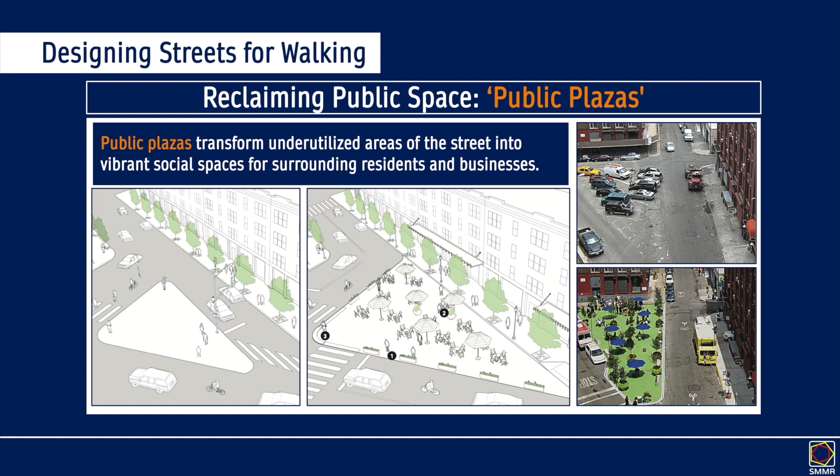So you can create public plazas that could involve removing parking or reorganizing it. This is in New York—this was not very optimized. They removed some parking and maybe offset it to a surrounding street, but they created a nice little public plaza, which is small but quite effective. If you live around here, you've got yourself a nice little coffee spot.

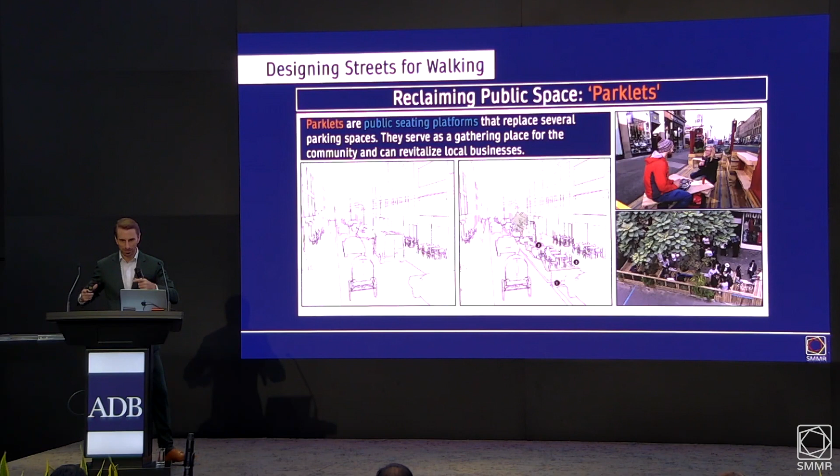The parklet concept, again, when you introduce a new parking strategy, you can keep a few spots just to create nice little outdoor spaces. I don't go into depth into the topic of street vendors, but there's a lot of street vendors in the Philippines. There are ways you could create designated spaces for them, and it can serve as a way to start formalizing your public spaces. This is a very iconic example.

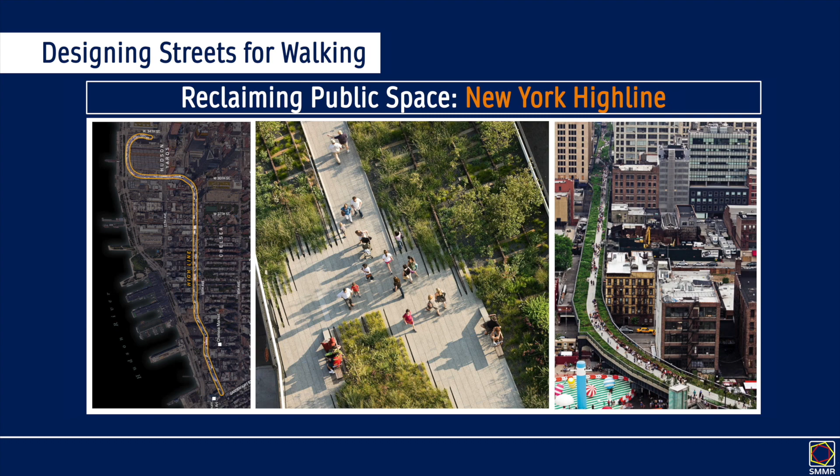It's about 2.4 kilometers long in West Manhattan. You might think this sounds extremely expensive, but similar to TOD, when you build infrastructure like this, it becomes very attractive, land values around it go up. Depending on your tax system, you can recoup some of that and cross-subsidize infrastructure like this. So if you make your city more attractive, you affect land values, and you can use that to cross-subsidize projects. There are also really nice examples in Seoul.

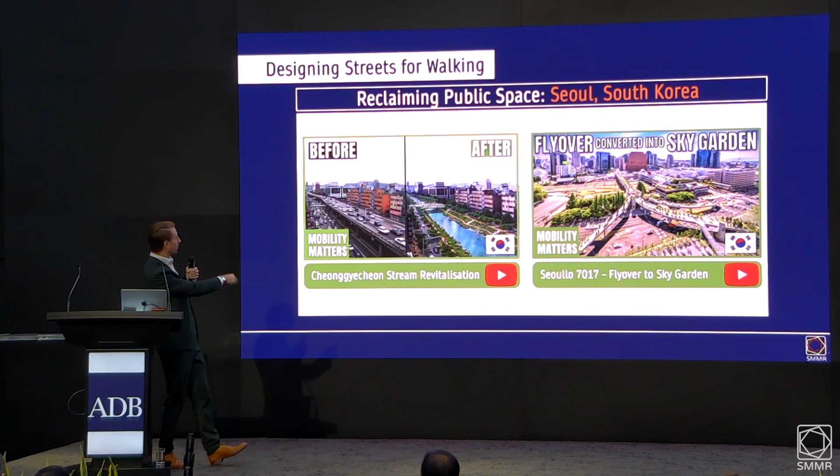This is Cheonggyecheon, where they had a small stream. They built a massive urban highway over it. But over 20 to 30 years, Seoul developed sustainable urban mobility projects. They created a vast public transport network and reduced the number of vehicles, then turned this stream back into a public space with somewhat of a river, a very beautiful space. This is also an old flyover, which they converted into an urban park. These projects might seem impossible, but if you can create interconnected public transport systems, then these ideas become more viable.

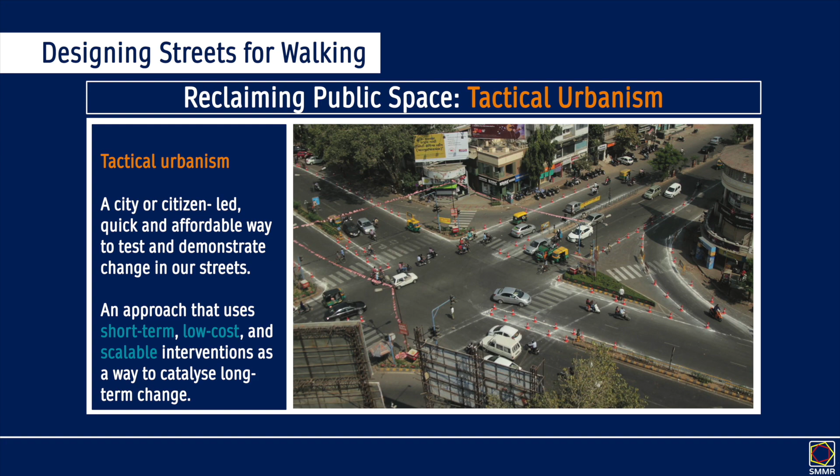Then there's the topic of tactical urbanism that we spoke about earlier. If you don't know where to start, you can start very simply using cones, and cones and paint can go a long way. We're happy to support you explore ideas which are not disruptive, and if they are disruptive, they're very easy to remove. Lots of nice examples.

So we're doing this in Phnom Penh. We could do similar in one of your cities. It's not just an exercise of paint - we did a lot of data collection, we're going to do some simulation of the space, and we'll make sure that anything we propose will improve the flow of vehicles, which will make sure our project is popular.

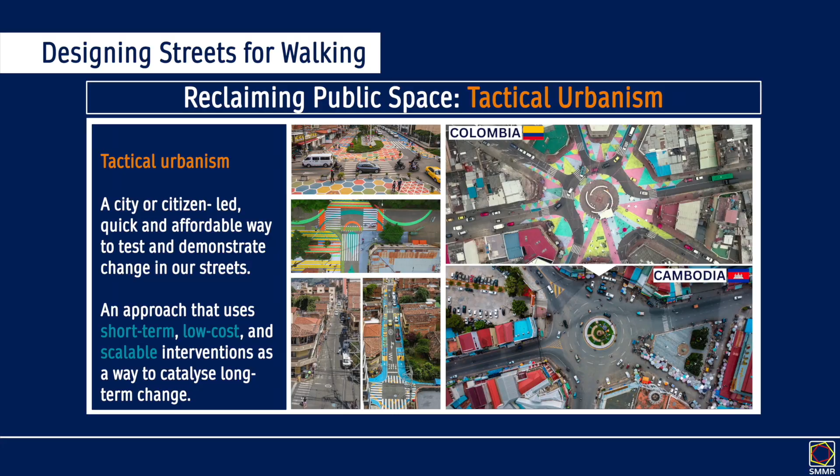There are a lot of other considerations I don't have time to go into, but in the future, if we can establish a good working relationship and this is a topic you're interested in developing further, we could deliver trainings or develop activities around parking, wayfinding, all the signage that helps people navigate, illumination, and green infrastructure. Utilities is a very important one - you can build very beautiful sidewalks, and then a different government department that takes care of utilities can come and dig it all up. So you want to find ways to better phase your non-motorized transport and street design projects with other utility projects.

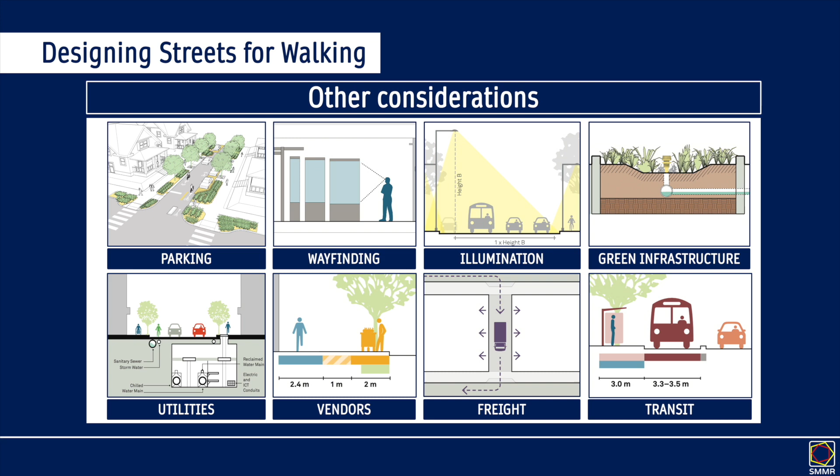Or if you go all out, like in Barcelona, they've created basically a tunnel network under the footpaths where you can access all the different utilities without having to dig up the street, which is nice but obviously quite expensive. Vendors, very important and relevant, freight and transit - lots of different topics we could have covered, we should have covered, but we don't have time for today.

On the topic of street vendors, there's often a desire to eradicate them, which is not realistic - people are not street vendors because they want to be, it's their livelihood. So we can explore ways to better integrate them. If there's a policy not to fully formalize them, you can still create designated spaces where these alternative street activities can happen. In Chennai, India - it's not here anymore, but initially they just painted lines where street vendors could sell and where they couldn't. There are policemen who enforce it, and it maintains a good pedestrian right-of-way.

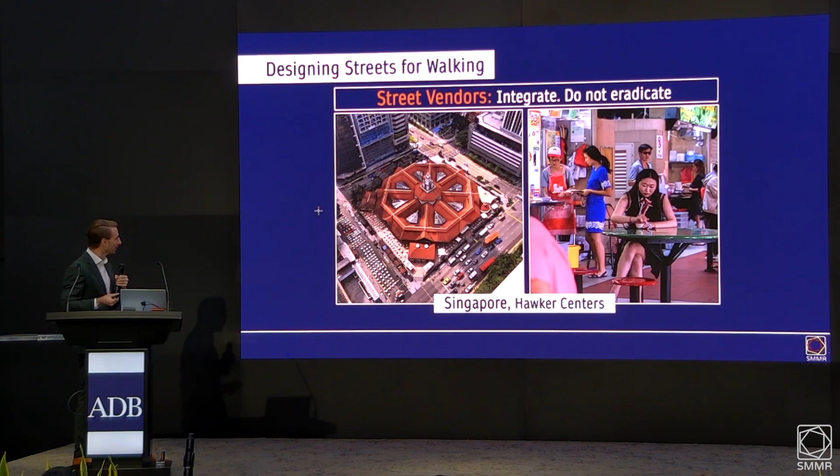In the longer term, Singapore did something really interesting. They didn't eradicate street vendors, they formalized them and gave them larger designated spaces called hawker centers. This is a very famous one where they've kept some of the street life. Obviously it's transformed, it doesn't look exactly the same as before, it's not on the street side, but they've kept that culture alive. As your cities modernize, I hope you can keep that fun street life that makes cities so interesting, and not look to eradicate it.